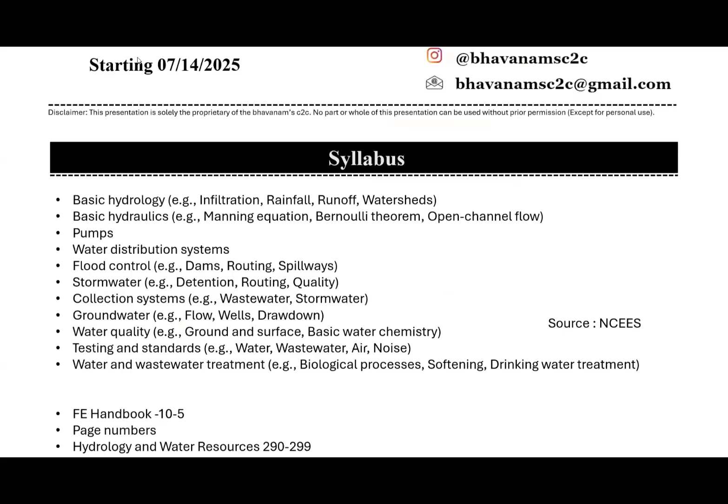Alright, taking you to the syllabus content. This is the syllabus content. I also got you the syllabus for fluid mechanics as well. Let's go with the contents of water resources engineering and environmental engineering first, and also let's give a look at fluid mechanics. You will understand why I brought fluid mechanics into the picture too, after we discuss the syllabus here.

Okay, the first thing is basic hydrology. It's going to discuss the concepts of basic rainfall, runoff, some infiltration, catchment area. These are the basic topics that we're going to discuss within hydrology.

And coming to basic hydraulics - you guys already understood what basic hydraulics is in fluid mechanics from the topic of flow measurement. The same formula, the same concept we're going to reuse here. Interestingly, the same formula is provided within the subject of fluid mechanics, and also within water resources engineering. So for example, if you search for Manning's equation or Bernoulli's theorem within the handbook, you're going to find it in a couple of areas, one in fluid mechanics and another in water resources engineering. Wherever you find it, the formula is going to be the same.

That's totally fine. And coming to pumps - there is no specific topic dedicated to pumps, but you will be able to handle it using the fundamentals that we discuss within the class.

Similarly for all the others as well: water distribution system, flood control, storm water collection system, groundwater - for all these five concepts, you'll have a direct formula from the handbook. All you need to understand is some tables, charts, and how to get the maximum out of the given formula.

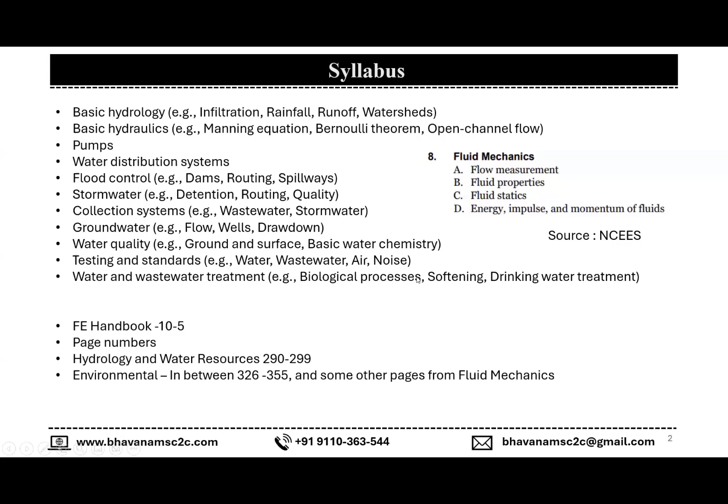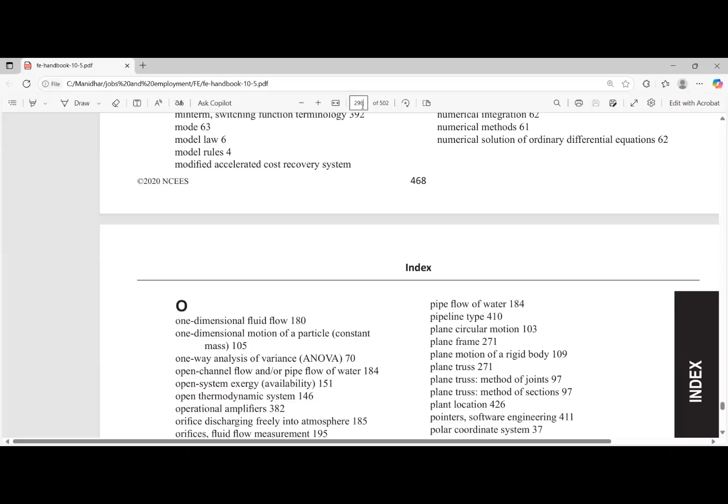So now we're going to discuss our first topic. But before discussing the first topic, I would like to make a quick tour from the handbook so that you guys will be able to understand what are the things provided to us for the subject water resources engineering from the handbook. I believe it is page 290. Yes, it is, and I'm just making sure.

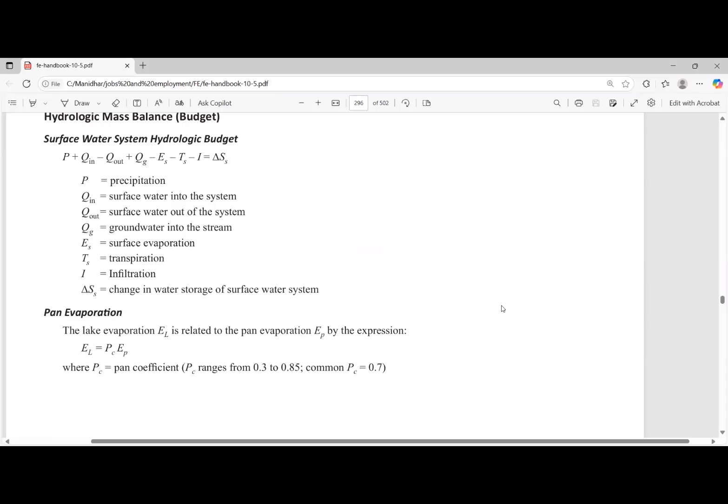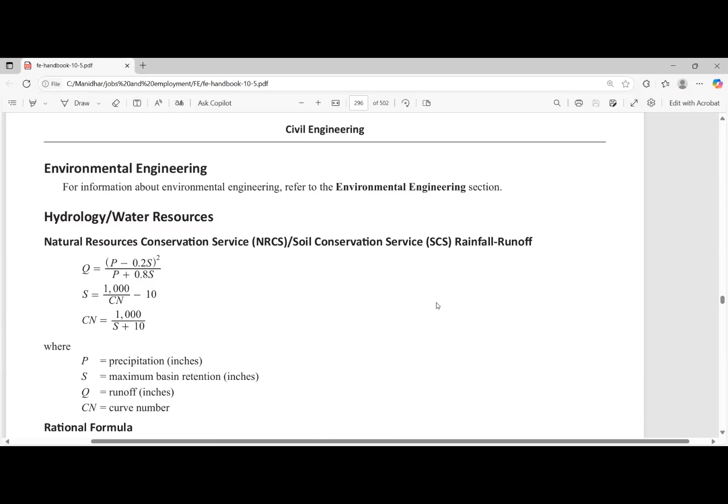So, as said, these are the pages from 290. Starting from 290, you're going to see the topics related to water resources engineering, and also environmental engineering. These two lines are not available to you within handbook 10.4 version, they are extra added here in 10.5. Similarly, there will be a few other lines extra added here and a few other lines omitted. So I recommend you guys, I suggest you guys better go with version 10.5, but not the previous versions 10.4 or 10.3.

So here are the formulas. Let's make a quick tour, and when we go to the concept, we'll jump back to the handbook again. Here are the things. They will give us few variables or few inputs within the question, like precipitation, infiltration, or intensity of the rainfall, storage capacity, curve number. We're going to discuss what is curve number. In our bachelor's we did not pay much attention to the curve number, but we're going to understand what it is here.

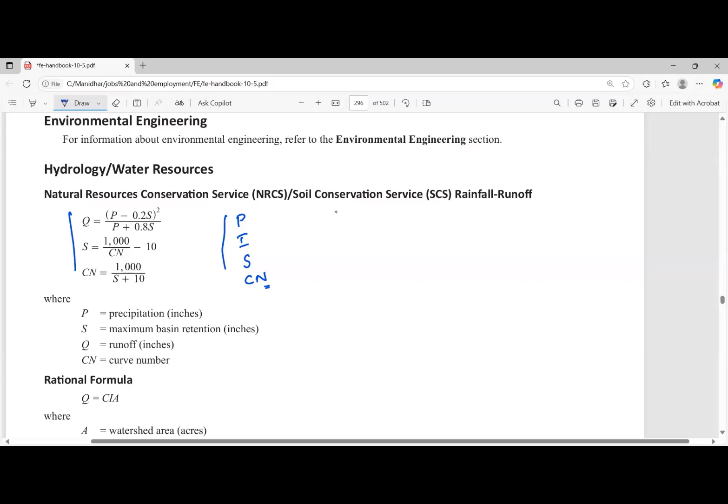So they're going to give certain inputs for us, and accordingly we will be able to calculate the runoff with the help of the formulas. We got to choose, or we have to identify, which formula is required for the given question. You will be able to figure this out by the end of this session, or with some amount of practice. I assure you guys, if you pay attention, by the end of today's session you will understand which formula you have to use to calculate the runoff. They may either give you NRCS within the question or SCS. If not, they're going to give you the title rational formula, or else they just give you some inputs like area, rainfall intensity, and accordingly you got to choose the formula.

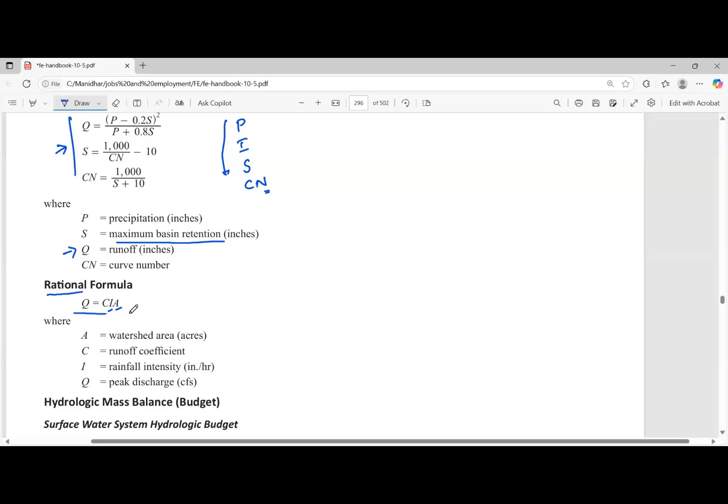So for say Q equal to CIA here, but there is no S here. When I say S, it is going to be maximum basin retention. So when they give you just I and A values, you got to choose this formula, but not any other, because from the set of these formulas, they did not provide any I value within them. So if you see any I value, which is rainfall intensity, then you got to jump to the rational formula.

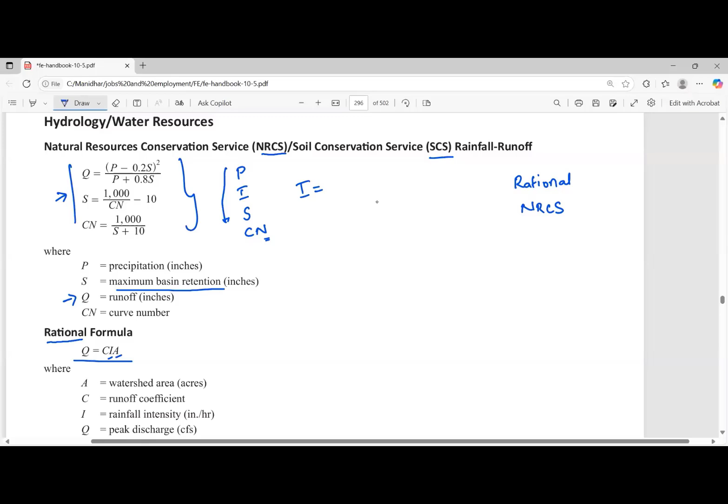Most likely, they're going to tell you which formula you got to choose for the given question. It can either be rational, or they may give you NRCS - when they say NRCS, this is the one. So you will be able to figure it out with some understanding. Now, a question to you: here they say Q equal to peak discharge, CFS. What does CFS stand for? Cubic feet per second. Yes, you're right, sir.

When you have to convert cubic feet per second to cubic yard per second, how do you convert it? My question is, if it is 54 cubic feet per second, how many do you divide by? 27. Divided by 27, you got it. So when you're converting cubic feet to cubic yard, you divide by 27.

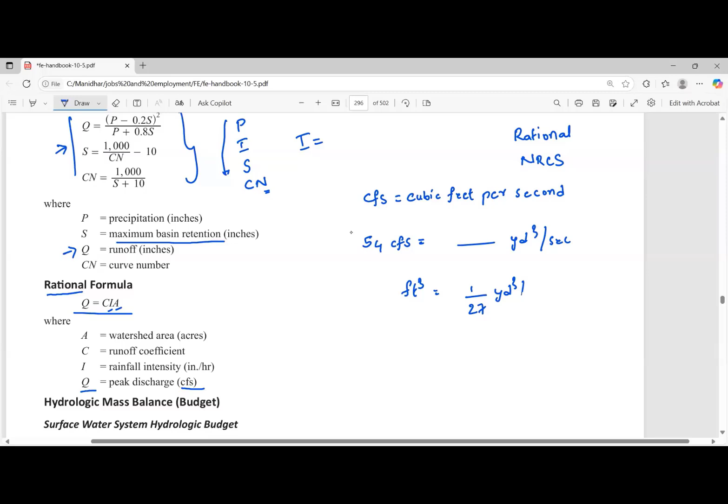This is because one yard equals 3 feet, and if you cube it, that's 27 cubic feet. So 27 cubic feet equals 1 cubic yard. In order to understand 1 cubic foot in terms of 1 cubic yard, you're gonna do this.

Suppose you forgot that 1 yard equals 3 linear feet, if you don't know that conversion, what you can do is jump to the initial pages of the handbook where you'll be able to figure out the conversions from one unit to another, like from yard to feet or feet to yard. You can flip to that page and do the unit conversions there.

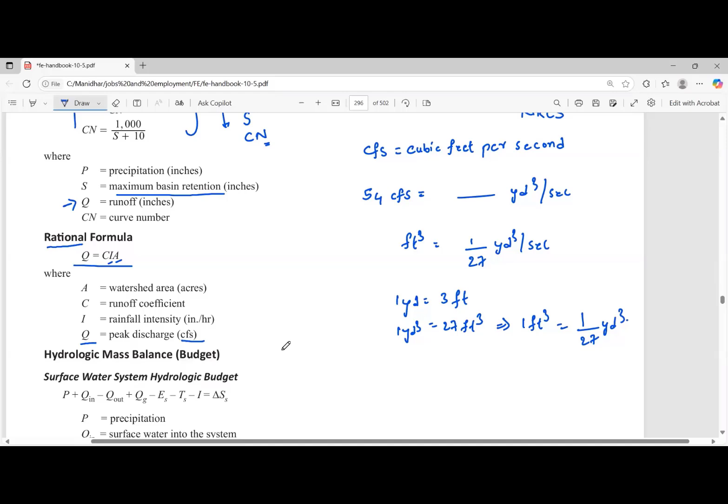So in this particular subject, pay attention to the units. Not only this subject, but for the entire exam you have to pay attention to units. Most importantly, within the exam, all four options you see will one way or another come from your calculation, so you'll get all the options as answer choices. But you have to get the right answer, and you'll get the right answer by doing the correct application of units.

The next thing is the hydrologic mass balance budget. You don't need to remember this title. All you need to understand is you may be asked to calculate the storage, or they may give you a few of the values here and you have to calculate one other value.

This equation represents that there will be some rainfall, and when there is rainfall there are some losses as well. So when there is precipitation there will be some losses. These losses can be for a number of reasons, like evaporation, evapotranspiration, runoff water, or infiltration.

There is some inflow of water and some outflow of water as well. What you understand from this equation is you have to add all the inflows, such as precipitation and discharge inflow through groundwater, and subtract all the outflows.

If you don't know what Q out is, those values or variables are described at the bottom of the formula. Understand the concept - you don't need to understand how the formula is derived, just understand the concept so you can solve the problem. The formulas are provided directly within the handbook.

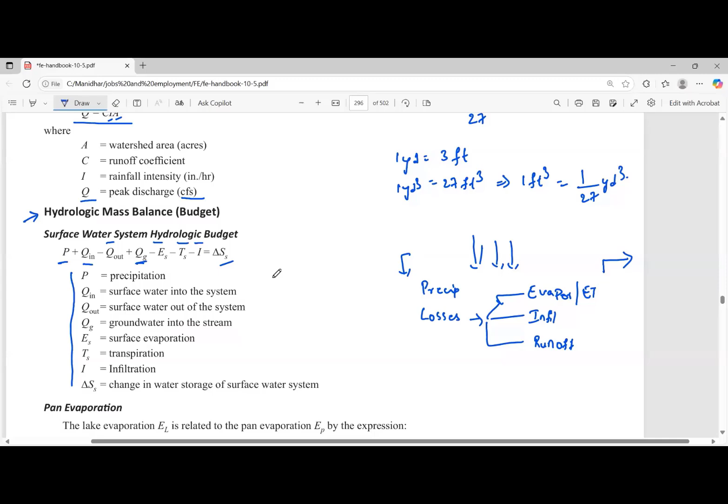The next thing is pan evaporation. What is the concept of pan evaporation and why do we need it? Any wild guess why we need this concept? You're right - it's to figure out how much water is going to be evaporating. For example, suppose this is a water body.

A water body of good size, say 100 meters by 100 meters. As a water resources engineer, or civil engineer, or environmental engineer, you have to understand the evaporation rate from this water pond. So what you do is put a pan in a specific area of this pond, and put some water within this pan.

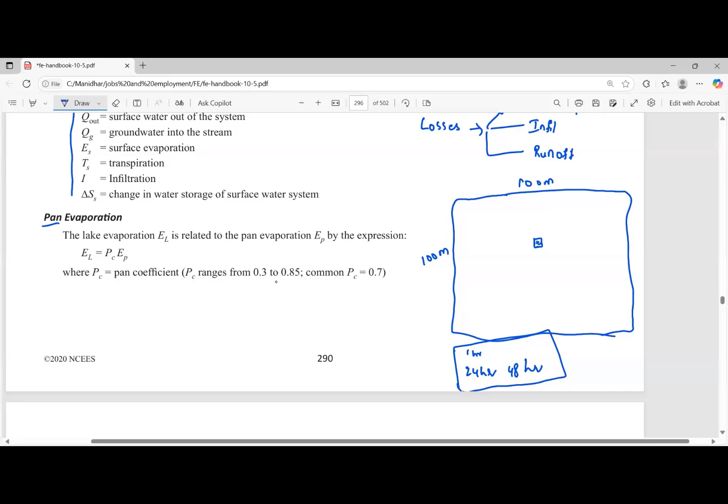After a few hours, they're going to do days of observation. So how it goes is they're going to take 1 hour of evaporation, similarly 24 hours and 48 hours. This interval is subjected to the environmental engineer - it's not a specific thing. So what they usually do is after a period of time, they understand the evaporation loss that happen from this particular pan. Based upon the evaporation loss from this particular pan, they understand the evaporation loss for a big size catchment area. So that's the concept of pan evaporation.

Here is the formula. In order to understand the lake evaporation, which is given by EL, it is multiplied by the pan coefficient, and the range of pan coefficient is from 0.3 to 0.85. In case they ask you to calculate the lake evaporation but did not give you the pan coefficient value, then you're going to take it as 0.7.

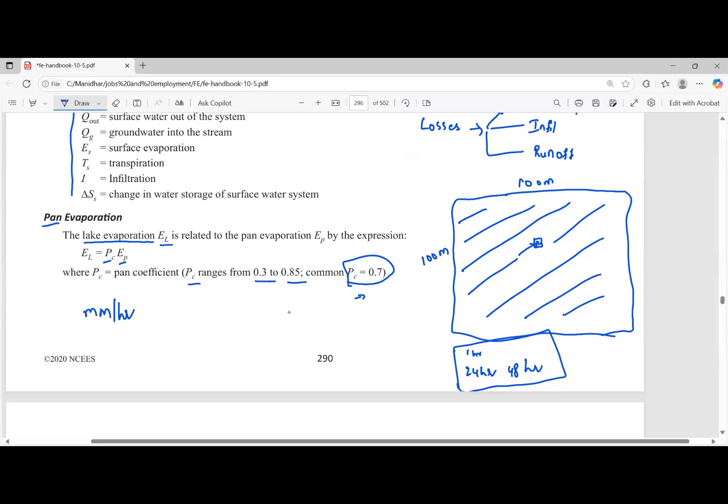And whatever unit they give you for evaporation, they may give you a linear unit, or they may give you in terms of millimeter per hour - something like that, you will get the evaporation rate at millimeter per hour. You've got to match the units as well. Pay attention to the units. When we jump to the problems, you will understand how we can pay attention to the units.

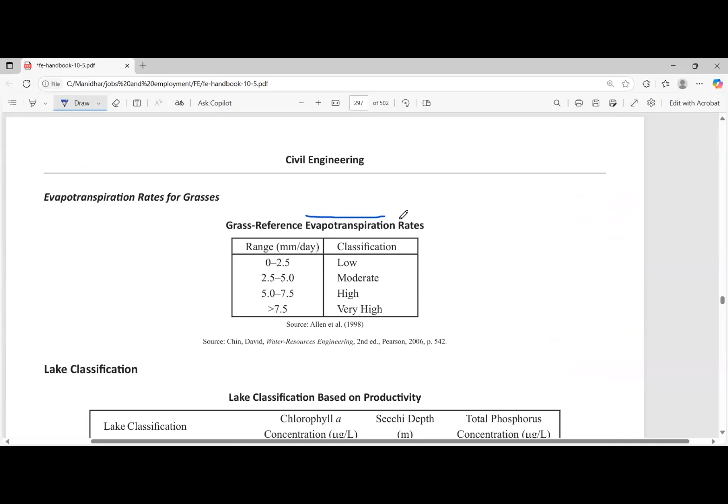And here is one other thing: evapotranspiration. This can possibly be a theory question, and it's a most underrated thing. You need not pay much attention, but as it is provided in the handbook, just give it a look - what it is, and what do you understand by evapotranspiration? Transportation of water from one water body to another through evaporation.

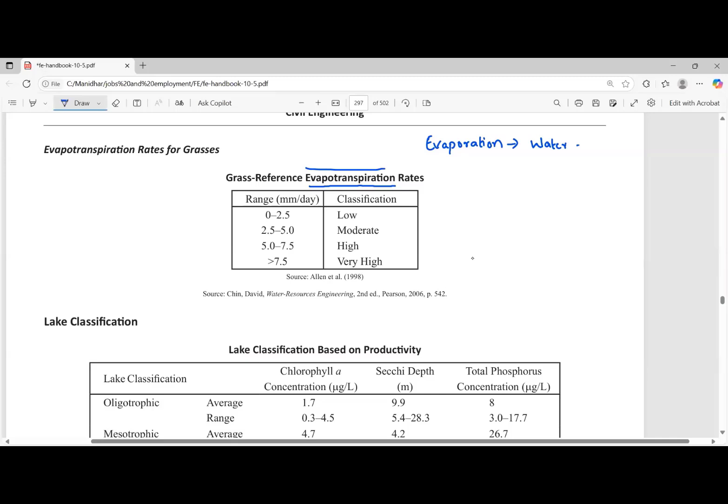Evapotranspiration is a combination of evaporation and transpiration. And what do you understand by evaporation? Like water turning into vapor from the soil or else from water bodies. Exactly, yeah - water turning to vapor, which is evaporation.

And now here is another question: what is transpiration? Water released by the plants. Exact answer. Now the combination of both - water released, or you can say water evaporated from plants, is called transpiration. So now the concept of both evaporation and transpiration is considered as evapotranspiration.

So how it happens is, though there is grass, there will be some sort of evaporation from its adjacent area, and also there will be some sort of transpiration from the leaves. So when these two happen in a common area, at a point of time you're going to pull this evapotranspiration into the accounts. But as I said, it is not of much great importance. All you need to understand is what is evapotranspiration, and they may give you a range like this.

If the evapotranspiration for a certain day is 0.01 inch, how do you classify it? Low evapotranspiration, low. So how do you say it? Since it is 0.01, it is in between 0 to 2.5, and hence it is low.

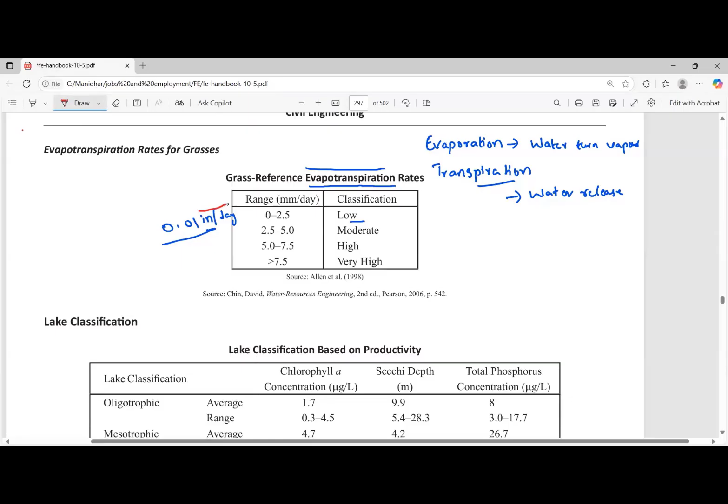Yes, okay, but let's pay attention here. What is the unit that I provided to you? Inch per day. And what does the table say? Millimeter per day. So we have to convert the inch to millimeter. What we're going to do is convert this 0.01 inch to millimeter. And 1 inch equals how many millimeters? 25.4 mm, correct? So when you multiply 0.01 with 25.4, it is going to be 0.254.

0.25, so I wonder something. It is 0.01, if you multiply it with 10, then you're gonna get it as 0.1. So here what I believe is, it is not 0.254, it should be 2.54, if I'm right. Or when we multiply... 0.01 into... no, you're right, 25.4 shows... 0.254. No, 0.254, right?

So here what I want to say is that if you are sure about the multiplications without using a calculator, then go for it. But if not, then there is a chance that we can make a mistake like this. We may assume that it is 2.54 instead of 0.254, as we just did. So in order to be clear on these kinds of calculations, if you are sure, then definitely go for it. If not, the best bet is to pull out your calculator and multiply it accordingly.

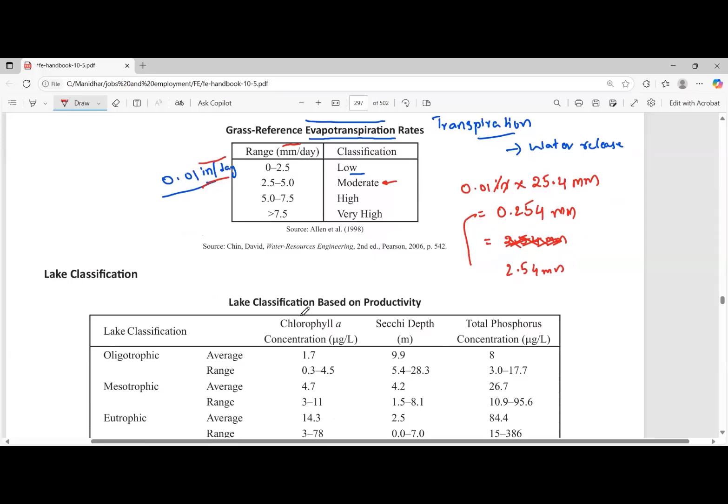Once again, pay attention to the unit that is provided to you within the question, and accordingly we'll be able to do it. Are we good on this? It's no biggie, but still you got to understand how the question can be framed. You should be able to answer it.

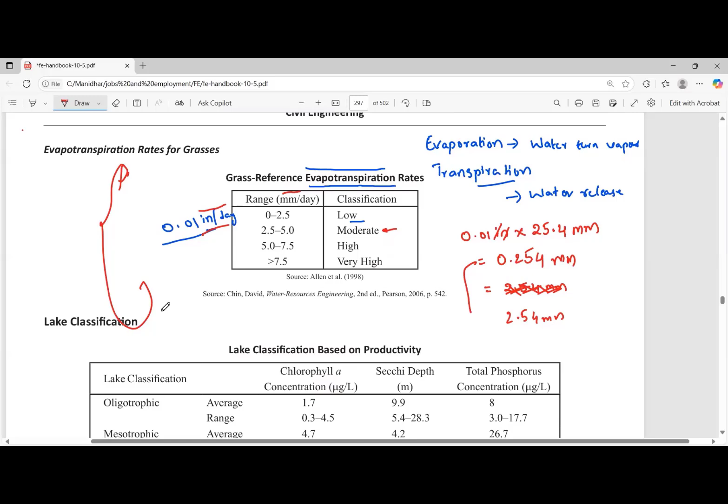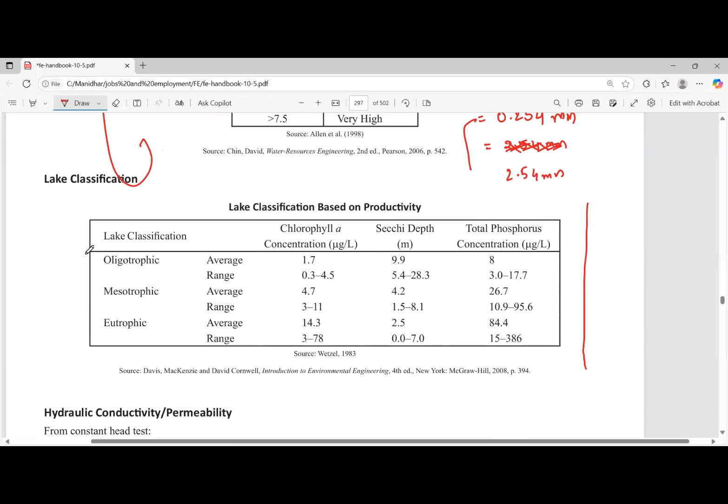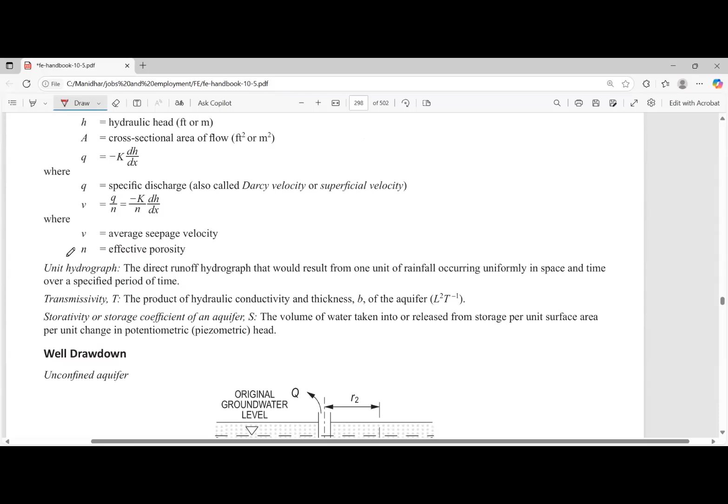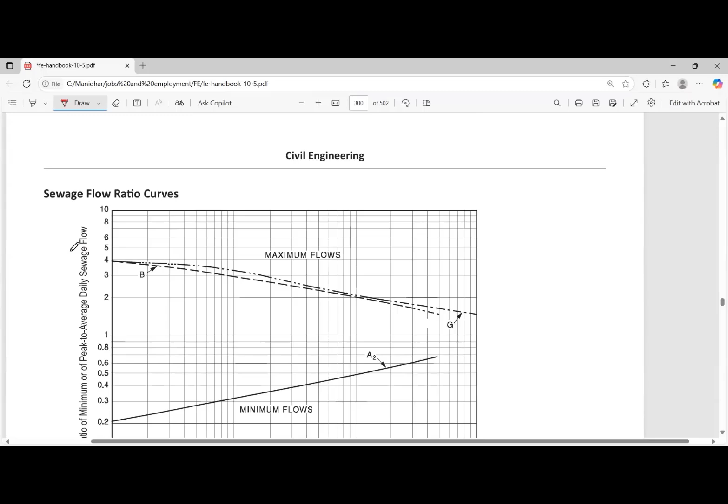Next thing is lake classification. We're going to discuss lake classification within the subject of environmental engineering, when we discuss water quality. We are skipping this for now, but it will be covered under environmental engineering. Hydraulic conductivity goes to basic hydraulics, and from there Darcy's law, well drawdown, Dupuit's formula - we're gonna discuss this topic by topic. I'm just letting you know what's here, and also sewage flow ratio curves.

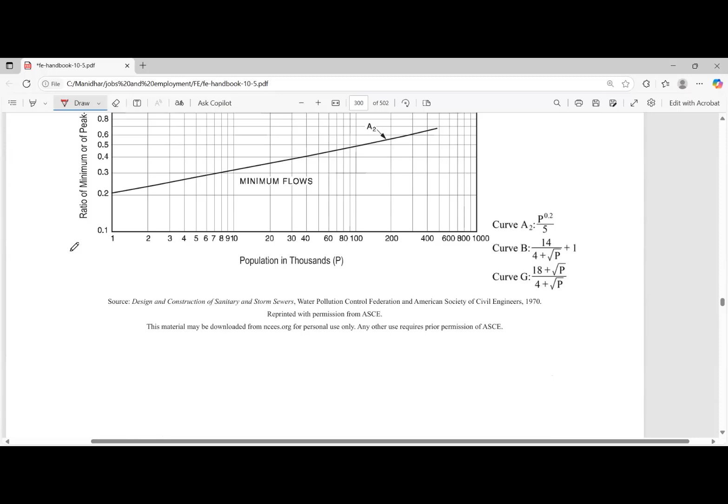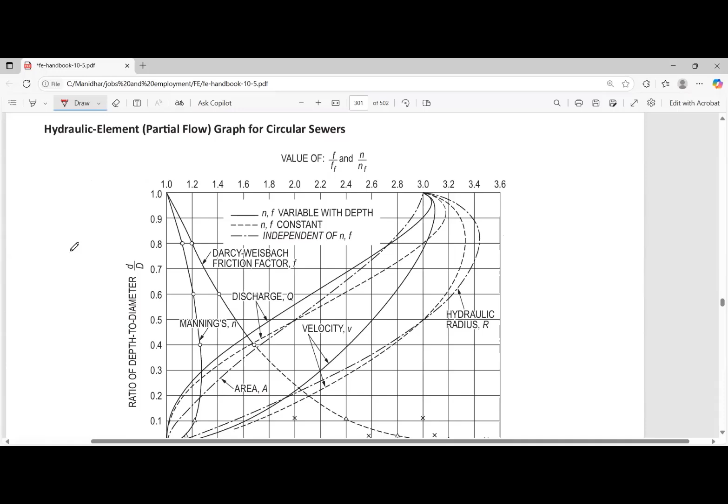In sewerage flow ratio curves, they may give us diameter and velocity. Accordingly, we will be able to calculate how much water is required for a particular day within a given community. Out of all the topics we discuss in water resources engineering, this topic is going to be a little critical. And if you understand it once, then you won't be making any kind of mistake.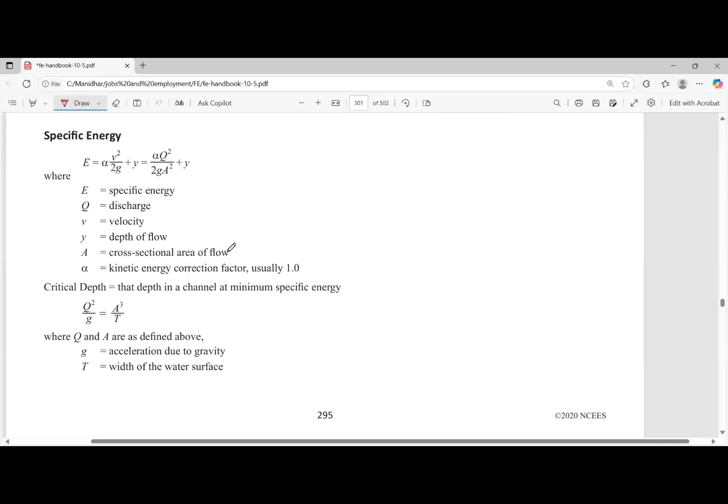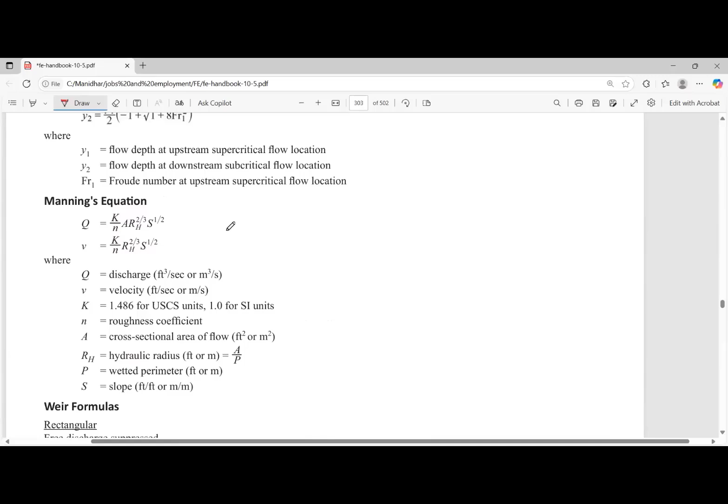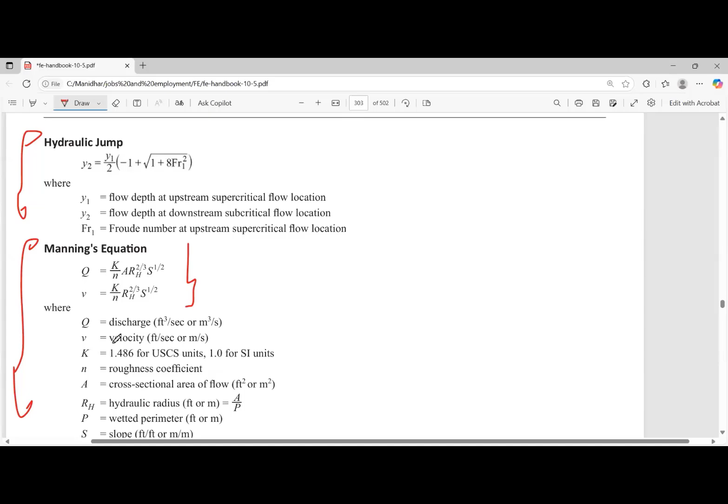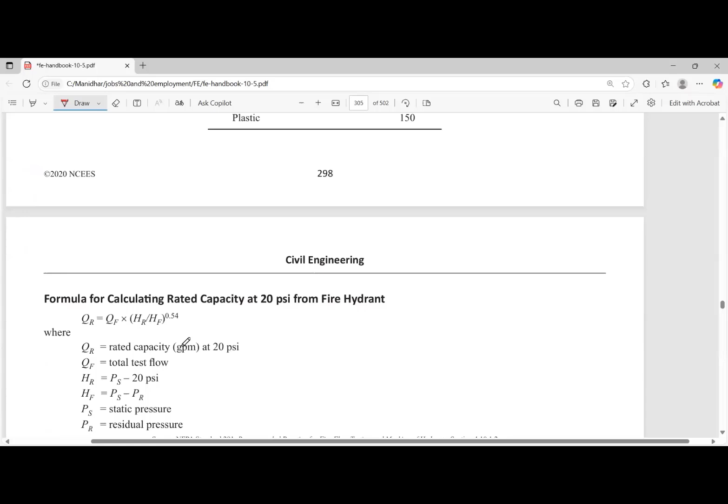Also, one other important topic is going to be somehow related to specific energy, and so are these formulas as well. You're gonna look at these formulas within the subject of fluid mechanics - Manning's equation, Hazen-Williams equation - from the subject of fluid mechanics. The same formula you gonna use here as well, so there won't be any kind of change within the formula. It will be the same formula, same units, same terminology. No big change. We're gonna run through all these formulas and solve a good number of problems related to all these and all kinds of variations you can expect within the exam.

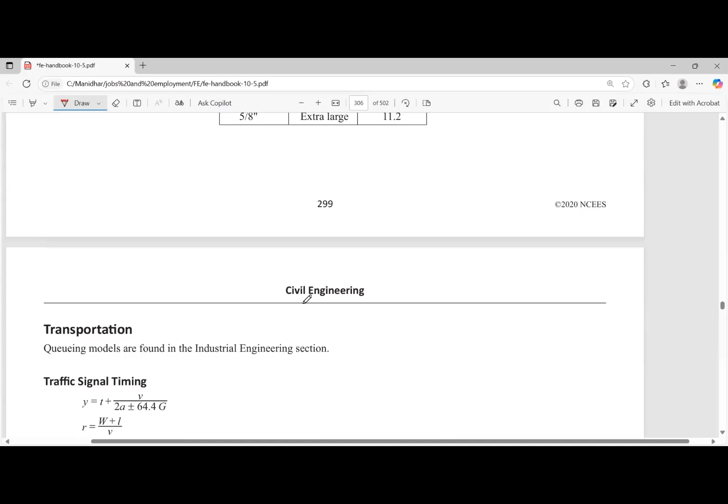You can make a note of the page numbers - we're going to end with 299 for water resources engineering, started at 290, so altogether it is 10 pages. If you are thorough with these 10 pages of content provided to you within the handbook, then definitely you will be able to answer 7 to 8 questions within the exam. All you need to know is where the formula is and which formula you got to use for the given question. That should be it. Besides that, as I emphasized, pay attention to the conversion of units.

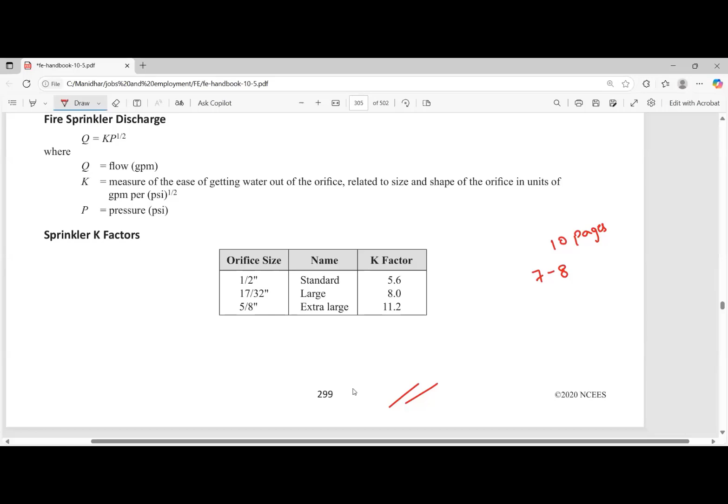So here is our first topic, which is basic hydrology. We're gonna discuss one by one. You all know what is evaporation, need not discuss much on it. But I would like to ask, any of you, please, if you know what is condensation, can you let us know what condensation is?

When the evaporated water cools down and settles back into the water body - perfect, so yeah, that's condensation. Basically condensation is the reversal process of evaporation. And as you said, the water is getting cool and comes back to the earth's surface. And the process of coming back is called precipitation.

The process of turning that gas molecule into liquid molecules is called condensation, and the process of falling down is called precipitation. So what is sublimation? Sublimation is not of great importance, but it is the process where solid particles directly convert into vapor without converting to liquid.

Is there any such example you can let me know? Yes sir, dry ice. Dry ice, exactly. Camphor. Yeah, camphor as well.

Okay, and what is meant by transpiration? Snow? Snow has got to convert to water first, and then it has to evaporate as a gas molecule. So I don't think snow falls into the concept of sublimation, but yes, dry ice and camphor do. So in cold areas, snow gets vanished without converting to water - in that case, maybe you can say that is a part of sublimation.

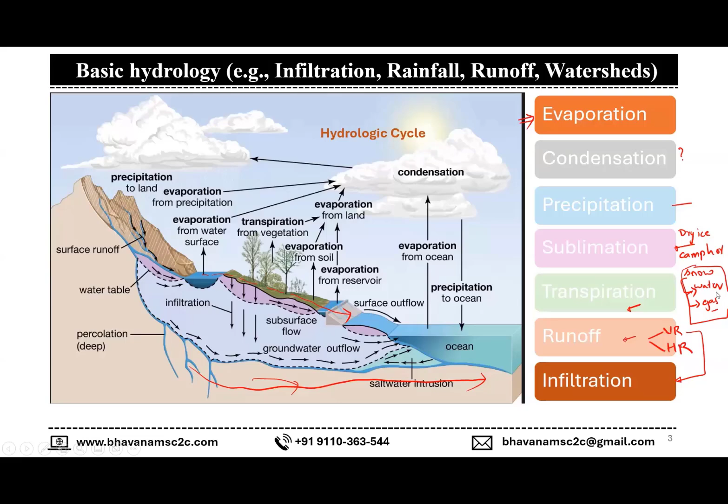Both answers are right. So these are the major contents of hydrology. Now, for your understanding, there are certain factors which affect all the topics we discussed - factors which affect infiltration, such as soil properties based upon surface cover, soil saturation, and rainfall intensity. There might be something else, but these are the major things we're going to discuss.

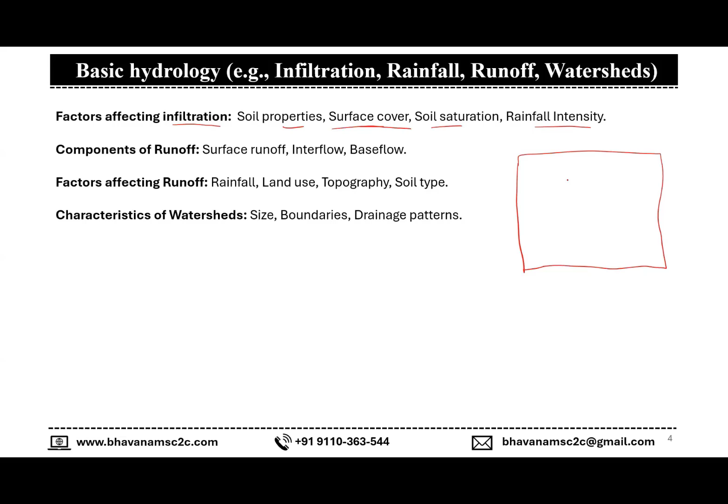And how does surface cover affect it? For example, there is a big plot, or a community. There are buildings in the community, built with concrete. In between the buildings, or on the outer side, you're going to have some vegetation area. All the dotted area is going to be vegetation area, and the rest is a concrete area - they did a concrete slab within this portion.

So where can you expect infiltration to happen - in an area of vegetation or in the area of concrete? Area of vegetation. Why is that? Because that is the ground level - infiltration will be more in vegetation, because the concrete surface is non-permeable, so penetration won't happen. That's why we see more infiltration in vegetation areas. An apt answer - I definitely agree with this and other answers as well.

So vegetation is going to accept, or let water molecules pass through that soil or through that top surface.

Whereas concrete area does not let water pass through it because it is a non-permeable membrane. Whereas vegetation is an area where you're gonna observe some sort of pores. When there are pores, eventually it's gonna let some water pass through. So that's how it is.

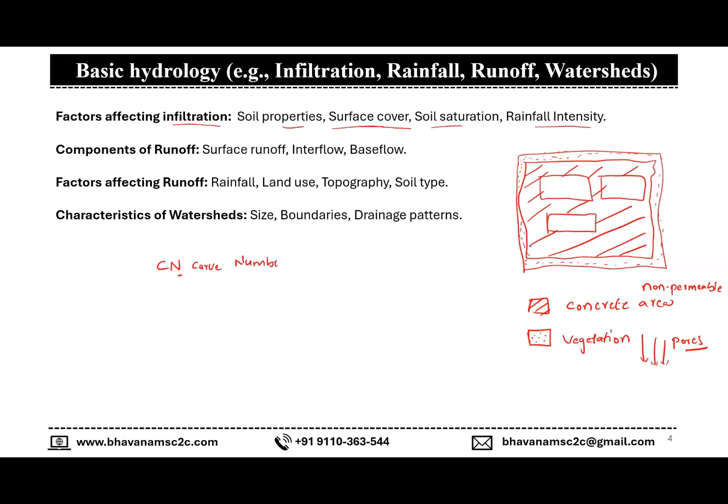So the curve number is nothing but how much amount of runoff occurs. The limits of curve number are 30 to 100. If the curve number is more, it means less infiltration, and if the curve number is less, closer to 30, it means more infiltration. We're going to see this thing as well.

And as we discussed, runoff is going to be surface runoff, interflow, and base flow. When I say surface runoff, it is going to be on top of the surface. Whereas interflow, it is infiltration. And base flow is like water percolating through the layers of soil, and after percolating through a certain distance, it runs through the horizontal layers in between the bedrocks, which is considered as base flow. And this base flow joins the water bodies after a certain distance.

On top surface, after rain, there can be a running of water. So runoff can be in these three patterns. And the factors that affect runoff are rainfall, land use, topography, and soil type. This is just for your theoretical purpose and to make things clear for you.

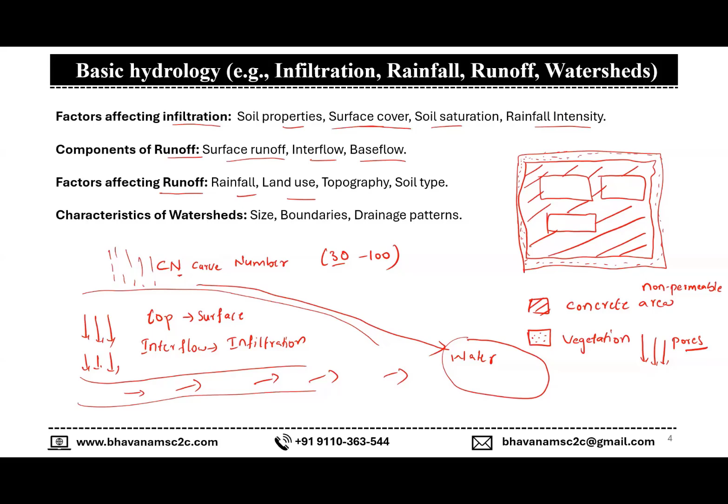Now, this is one theory question that I framed for you, in case you can expect these kinds of questions too, but very minimum. Read the question to yourself, and you're gonna give me the answer.

Evaporation. So no explanation needed. The question is, which step in the hydrologic cycle converts water from a liquid state to gaseous state? The answer is evaporation. Whereas condensation is a reverse process of evaporation. So does precipitation as well, which is the process by which condensed water in the atmosphere falls to the surface. That falling concept is called precipitation.

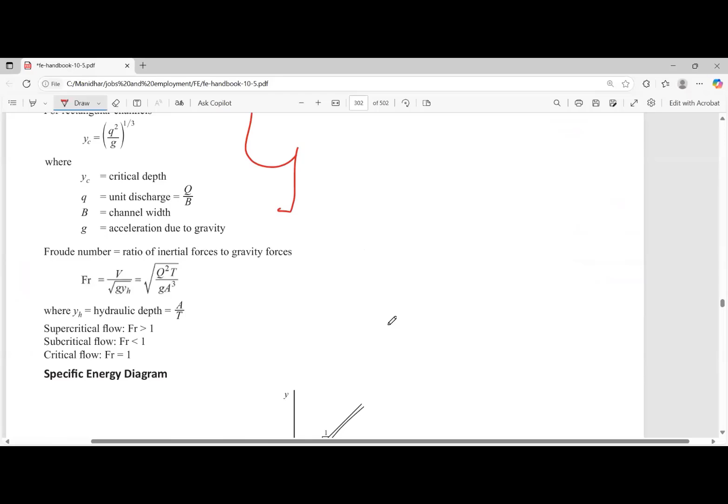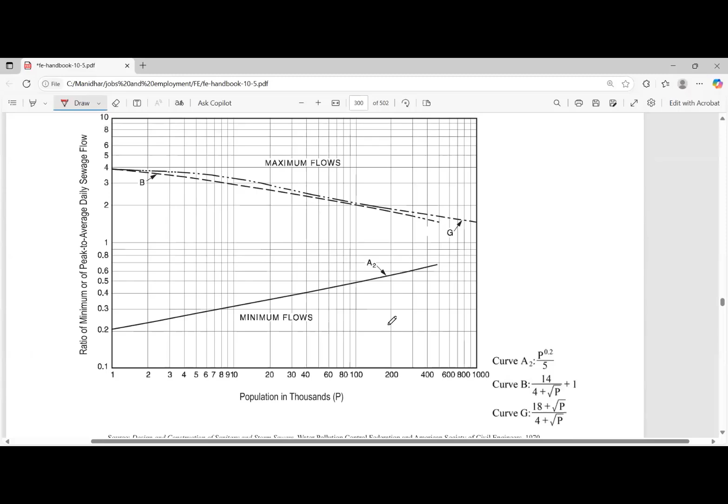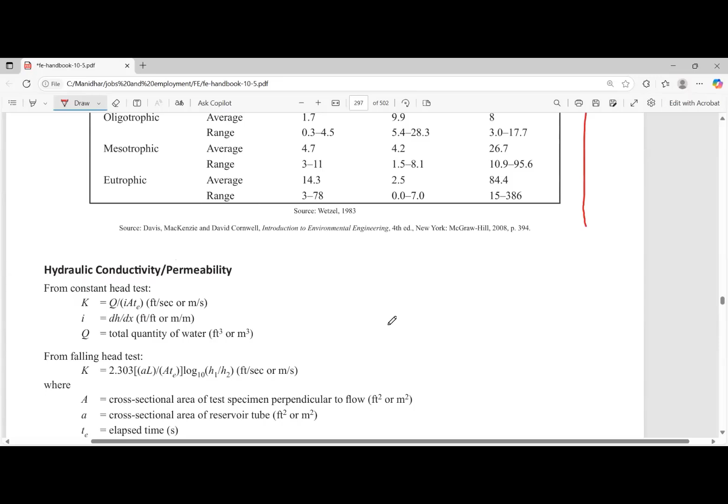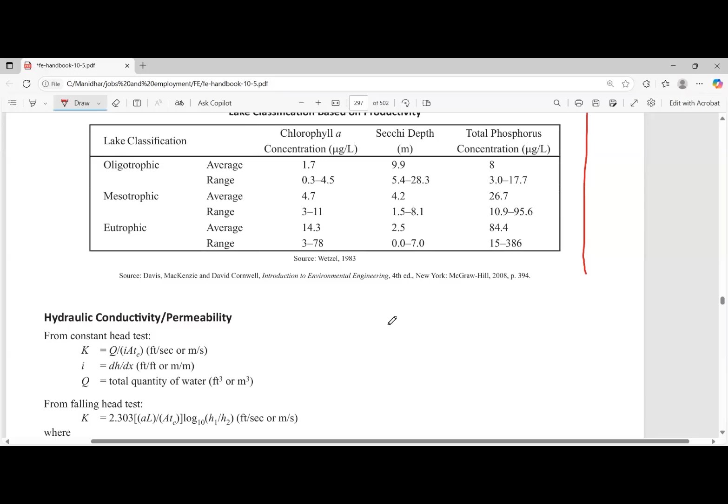So the thing is, having minimum knowledge related to civil engineering and a good number of years of experience, you should be able to solve all kinds of questions. If there is no time limit, though they give you the handbook, you should be able to solve like 80 to 90 questions without any problem. But you got to solve within the stipulated time. If you pull down the numbers, it is going to be 2 minutes 54 seconds for each question, to be precise, so roughly 3 minutes. Within 3 minutes, you got to find out where the formula is located, plug in the values, check out the result, and convert the units. That's all we need to do to the maximum extent.

All right, so here we are rediscussing the concept of runoff.

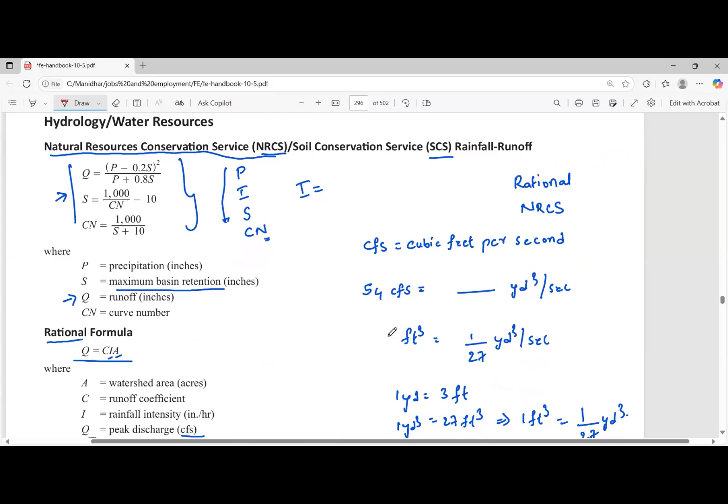So does the peak discharge as well. Okay, question to you: is runoff and peak discharge the same? So the question can be framed that way. It won't be the same. No, it won't be the same - like the base flow, everything adds, then there will be an increase in the peak discharge. So I'm thinking in that way, they might not be the same. Yeah, and I would like to hear one other answer as well.

Someone is about to say something. It is like how much water is leaving, then we can call it runoff. But when it comes to peak discharge, it's how the water is flowing to the maximum point in a particular time. Yeah, you're right, you're absolutely right.

And one major difference here I would like to let you know - both the answers I got from you are absolutely fine and correct. So I would like to add one other point: the runoff is calculated in terms of inches, whereas the discharge is calculated in terms of CFS, which is volume, whereas the runoff is calculated in linear dimension, in terms of inches.

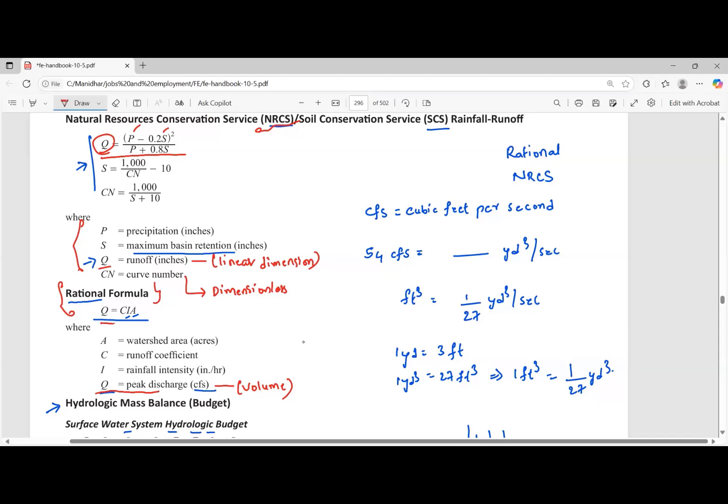Okay, and also one other thing is the rational formula. What is the general formula for discharge? What do you understand as the general formula for discharge? Whatever comes into your mind - what volume is the formula for discharge? Like in fluid mechanics, the volume flow of water by time percent - we will consider Q is equal to AV. Okay, I got Q equal to AV, and somebody said velocity times area.

That's absolutely fine. And I missed one other answer - flow per second, something like that. Yeah, flow per second, absolutely fine. How much flow is happening within a unit period of time? It can be seconds, or hours, or any course of time, but yeah, this is the usual conversion that we follow. Okay, Q equal to AV, that's one good answer that I like.

Here it is the same - Q equal to CIA is the same. Whereas C is the coefficient, it's some coefficient that we don't know at the minute, but it is a coefficient. A stands for the same area as before, and V is velocity, but here that particular velocity is the velocity of rainfall. It's the same formula - discharge equal to A into V applied in a different format, where I equals the velocity of rainfall, called rainfall intensity, given in inches per hour.

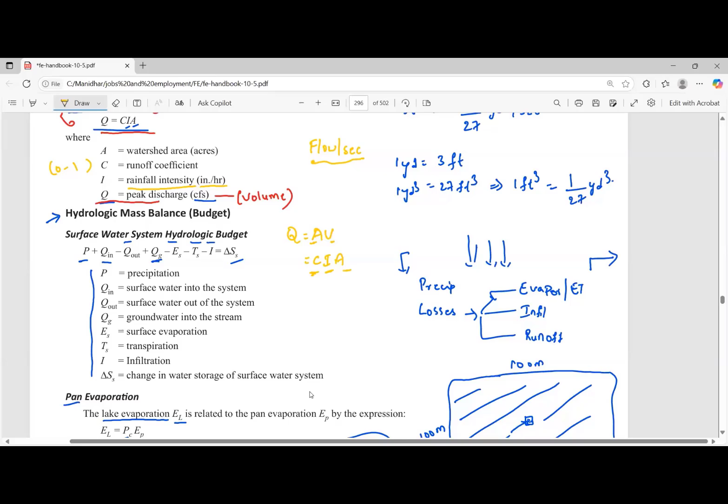So not to kill too much time, we're jumping back to the problems. Here's the same formula, I pulled it up just to let you know about curve number, since curve number is not provided to you in the handbook, and curve number is a dimensionless parameter. The range of the curve number is 30 to 100. This is not provided to you in the handbook. But it's better if we learn about it.

This is a summary. Though you don't need to remember it, understanding it will benefit you while solving problems. A higher curve number, closer to 100, means less infiltration, which is a concrete kind of area. Whereas a lower curve number is going to be a vegetation area.

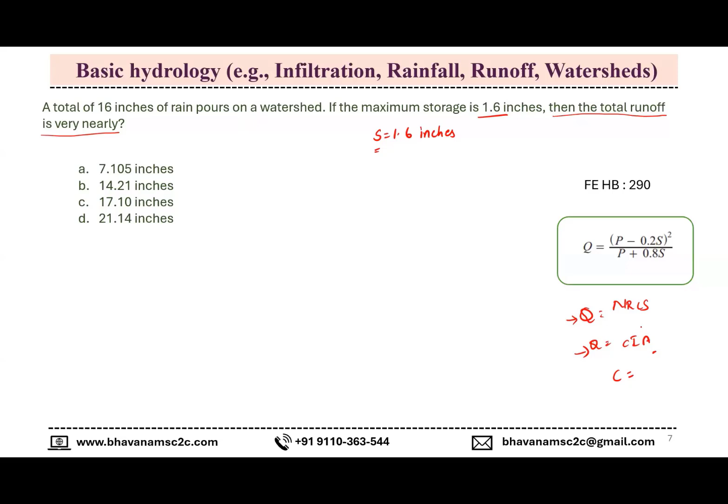We're provided the maximum storage, so based on that - yes, and they gave us maximum storage, which is 1.6 inches. And what else makes you think of it? They haven't given the coefficient - exactly, they did not give the C value. They gave the S value. Most importantly, what did they ask us to calculate? Total runoff. When they ask for total runoff, which Q stands for total runoff here - the one in the NRCS formula, or the one in the rational formula? NRCS. Flip to page 290 of the handbook and you'll see Q equals this particular formula, where Q stands for runoff. Whereas the other Q, which equals CIA, is the rational formula that stands for discharge - that's for peak discharge. So here are the things: they gave us the P value and S value, which are 16 inches and 1.6 inches.

From this particular formula, you'll be able to obtain the value of runoff. And what should be the unit of Q here? Inches - you're right, sir. So what value are you getting for this? If you substitute in, plug in the values, pay attention to the brackets as well - 14.22.

14.22. All right, so it can be 14.22 inches. So, okay, in exam, it can be in such a way.

Then the total runoff is very nearly in feet. And in the options, they may not give you any units. If that is the case, the options will be like, they're gonna give you one option which matches the feet, and another option which matches the inches as well. So looking at the options, we may think that 14.21 is the answer, but in case if they provide feet in the question, then you got to convert that.

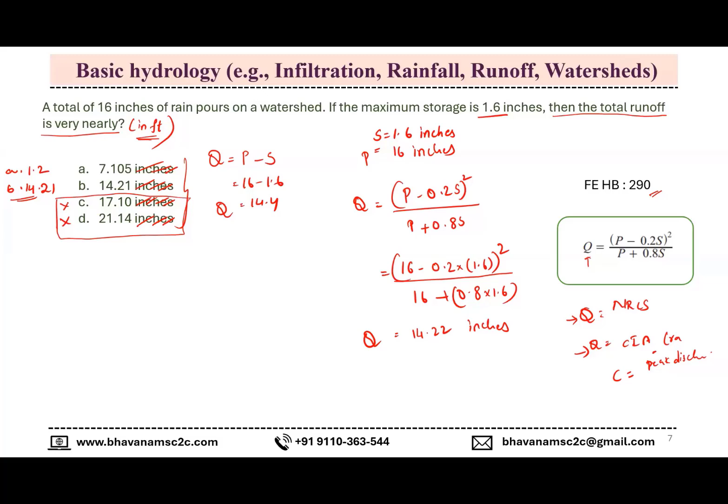And if the precipitation itself is 16 inches, then your runoff cannot be more than 16 inches. So here in this particular example, option C and option D should not be your answer for sure, because in maximum of the cases, unless and until the area is very wet, the runoff is lesser than the precipitation. All right, are we good here for this particular formula?

Okay, moving forward. So here is one interesting question. If you solve this, then I admit that you will be able to solve any kind of problem that is related to basic hydrology. For now, we are solving it together, but you're going to see similar problems within your practice as well.

Read the question and understand it. Let's solve it together. The question says, an urban area consists of 15 acres of lawn space with curve number 70 and 4 acres of paved road with curve number 97. If the total precipitation is 16 inches, what is the approximate runoff?

What is the formula that we have to pick here? What are the values that they gave us within the question? Q is equal to C I A. Why is it so? As in the question provided, they gave the area. They provided the area.

Agreed. So don't we have area within the NRCS formula? No. Yes, they did not provide, but still, what do they ask us to calculate? Approximate runoff. Runoff means which formula you got to pick it up? NRCS. Absolutely fine.

And when you're picking Q equal to CIA, what is the unit of Q? Inches? Cubic feet. Yeah, when you're picking a rational formula, it is going to be cubic feet per second, whereas if you're picking NRCS formula, the unit of Q is inches. All right, so you will be having a good number of clues provided to you on which formula you got to pick.

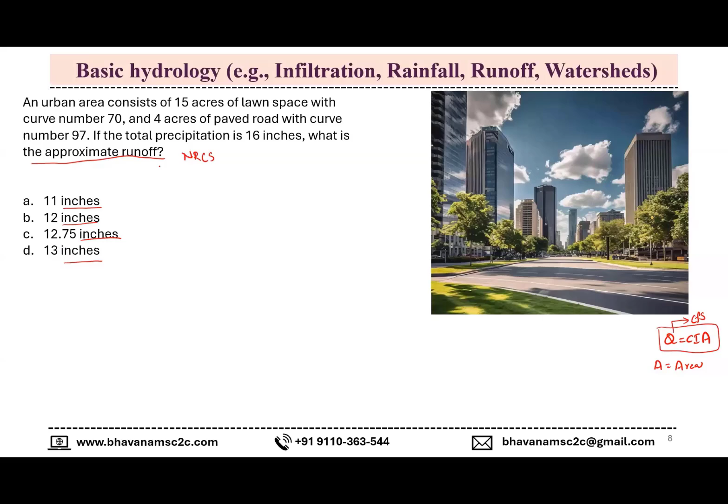Okay, so now which formula goes good for this? We got a clarity that we have to use NRCS formula, but in NRCS, which formula goes good? What is the formula for Q? S equal to 1000... what is that? Curve number. What is the curve number?

So in the question they gave us area, 15 acres of lawn space with a curve number 70, whereas 4 acres of paved road with a curve number 97. So what is the formula that is associated with curve number and the precipitation so as to calculate the approximate runoff?

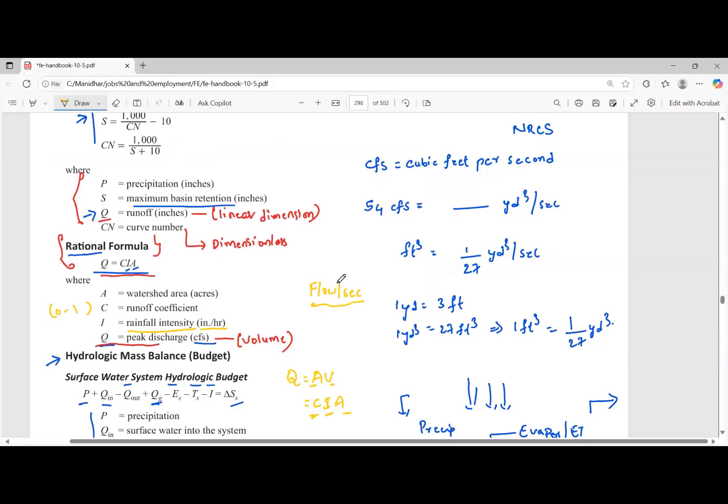Able to figure it out? Is there any formula that is associated with curve number? It's associated with two of the formulas over there. Uh-huh, yeah, you are right. So now let's run back to the handbook here.

So yeah, curve number, they gave us a formula. We already got curve number, which is provided to us within the question. In order to calculate Q, what are the variables that we require? One is P and another one is S. Correct? Yes or no? Do we need any other variable apart from P and S? No, right? It is just the variable P and one other variable is S. So already P is provided to us within the question and we got to calculate S. So if we are able to calculate S and substitute the value of S within this particular formula along with P, then we will be able to get the value of Q. Correct?

In order to calculate the value of S, it is going to be 1000 divided by curve number minus 10. But here is the question.

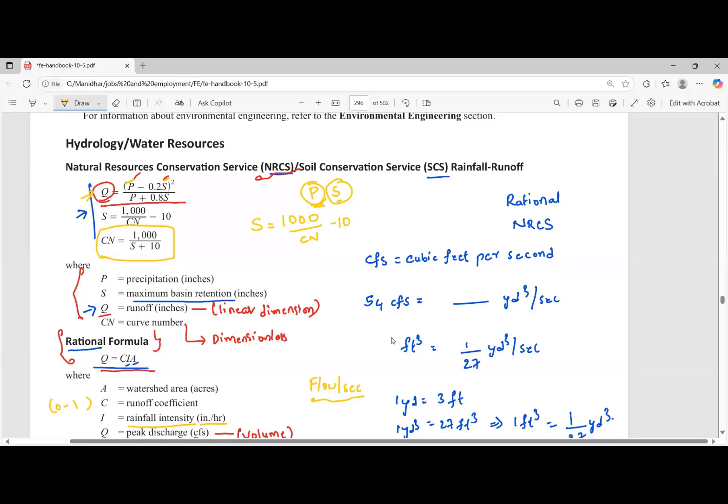Within the given question, they gave us two curve numbers. So how are you going to do it? How are you going to handle such a case when they give two curve numbers? 15 minus 4, okay.

Question to you guys, and also I'd like to brush your memory. You attended the subject mathematics and statistics. If you did not attend it, that's not a biggie, but those who did should be able to answer this. Weighted arithmetic mean - you remember this concept? Yes, okay, 15...

15 into 70, 4 into 97. I got exactly, 76. You guys are amazing doing that.

So weighted arithmetic mean, you're gonna do that. What is curve number here, you're gonna get A1 C1. C here stands for curve number, I just wrote it as C for your understanding. So in order to calculate curve number, you multiply area and curve number, then add them and divide by total area. Then you will get the curve number for the entire plot, a single common curve number.

Most importantly, when you calculate in such a way, the curve number should be within the range they gave - here the range is 70 and 97. So if you calculate a common curve number for both lines, it should fall within 70 to 97. Now let's calculate and see if it falls in that range.

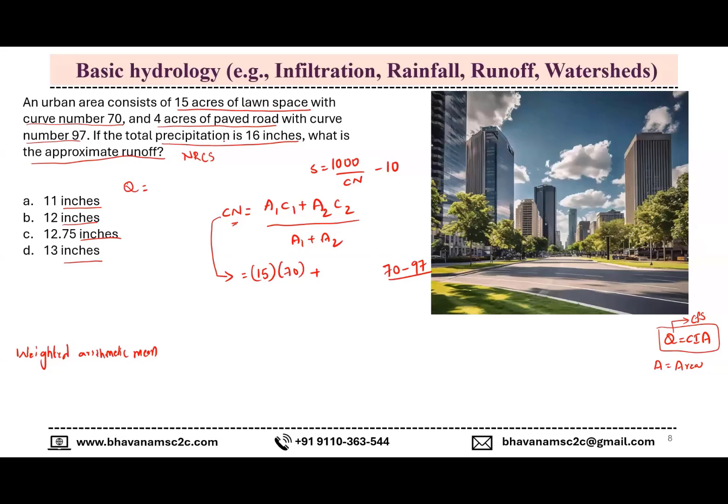A1 is 15 acres with curve number 70, whereas A2 for the paved roads is 4 acres with curve number 97, and total area is 15 plus 4. So what's the curve number for both together? 76, 75.68, thank you.

75.68, 75.68. Yeah, okay, that's the curve number.

And what is the unit for curve number? Dimensionless, it's a dimensionless parameter. So no unit for that.

If possible, guys, please scribble it down so that while discussing, you look at the things again and again - they'll sit in your memory. Okay, so now answer is C.

Answer is C, let's see if it is right or not. So we got curve number as 75.68. And what is the S value after getting the curve number? 3.16 inch, that's a good thing - you emphasized the unit.

3.16 inch. Now you got the P value, which is 16 inches - that's a common precipitation for the entire area with curve number 75.68. At this point you don't require curve number because you got the value of S, which is 3.16 inch. Now you're going to calculate the runoff based on the P value and S value.

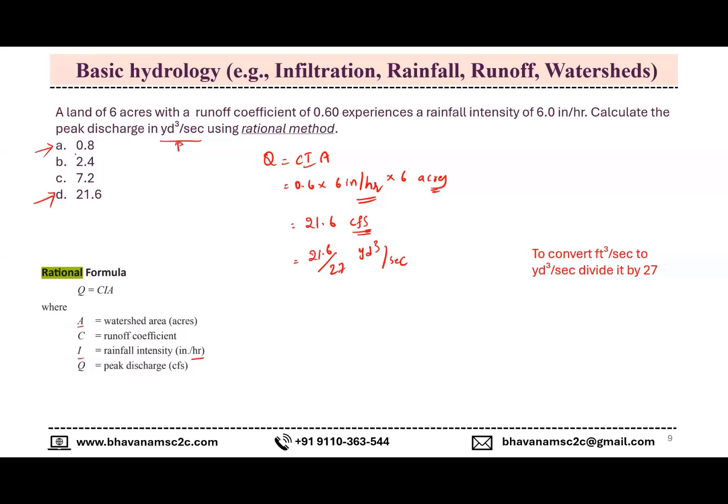If you multiply, you're going to get an answer of 21.6, but the units here are CFS. They emphasized the unit as cubic yard per second, so we got to convert this cubic feet per second into cubic yard per second. You do that by dividing by 27, and that converts cubic feet per second to cubic yard per second, giving you the answer of 0.8.

Among all the given options, somehow or other you're going to land up with the wrong answer too. Once again, there should be a second check whatever the problem you do within the exam. Pay attention to the unit that is provided to you. I am damn sure, having minimum fundamental knowledge and the formula in front of you with a calculator in your hand, you're going to get the answer, and that answer is provided to you within the options. But you're going to pick the wrong option because of units.

So when writing a formula, can we go with the conversions in the formula, like using a handbook, CIA into whatever the conversions, 1 feet to yard square, then we can get it right away, right? You can do it, absolutely fine. That conversion is up to the level of aptitude you have. So you can convert inches per hour to yard per second, and you can convert 6 acres to yard square. If you do so, you're definitely going to land up with the answer, but you've got to make it accurately.

Okay, and the next thing, this is one other question. Do you want to solve this problem yourself, or shall we solve it now? We'll solve it ourselves. That's a good thing. This is an add-on question to this question.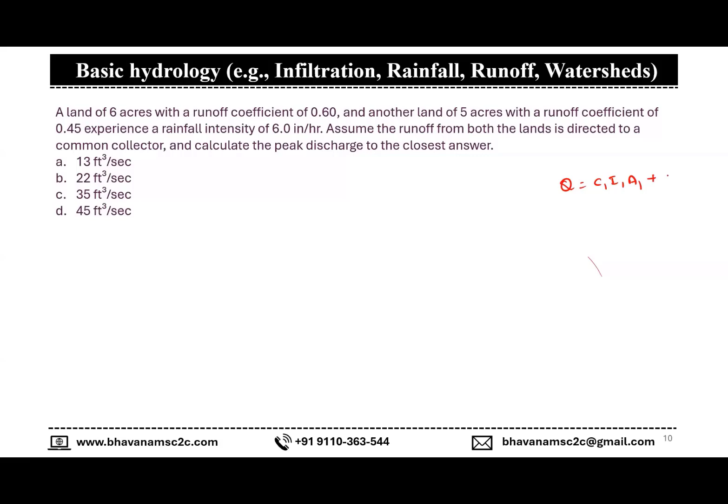Take a screenshot or photo of this. Tomorrow's session, we're going to start with this question if you do not get an answer. If you get an answer, that's fine, you'll be able to solve it. No biggie, you're going to apply the same formula, but you're going to sum it up like this. If you use this, then definitely you're going to get the answer.

All right, so any questions for the day? Here also you can apply the weighted arithmetic mean also, right?

Yeah, that's a good question. That's really a good question. I'm foreseeing this question actually. So, well, you cannot apply it, but why? If you understand this, then I admit it, you understand the total hydrology concept. Here we cannot take the arithmetic average. Why is that? Because of the intensity they gave.

Okay, they gave us intensity. Intensity is going to be the same, that's for sure. But here, okay, here is the question: for curve number, we are taking arithmetic mean, but here for runoff coefficient, we are not taking arithmetic mean. Why is that? Rational method - what's the reason?

You said maybe it's because the intensity for the both rainfalls is same for different both lands. That is understandable, but why are you not taking a common runoff coefficient for both?

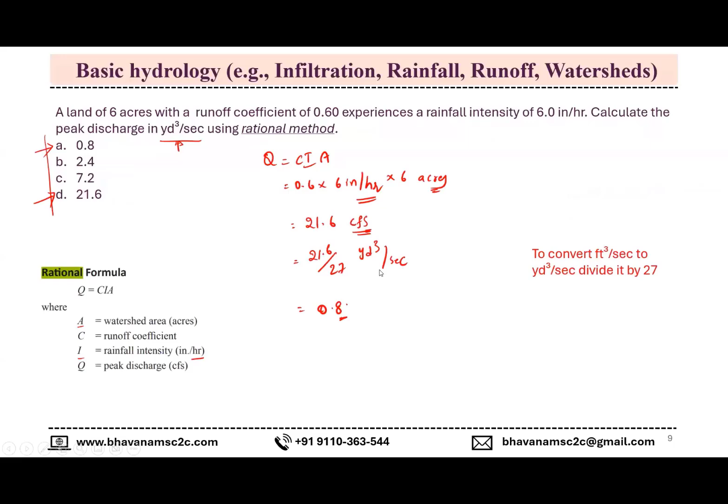Okay, let's go back to the visualization. Once again, I'm taking you back to the previous question, okay? Whoever asked this particular question, I have to appreciate this - you definitely got a good doubt, I can say that. Visualize this question here. What does it say? It says that 15 acres of lawn space, which is a green space of 15 acres, correct? Is it because this question comes under same land, and there we are considering two different lands?

Well, exactly, they have the approximate - that's the answer, that's the answer. So, as you said, you're right. The 6 acres is going to be one plot, and the 5 acres is going to be one other plot. These two plots are two different plots, and hence you cannot get a common runoff coefficient here. Suppose within the same problem, if they say the runoff coefficient for a concrete pavement is like this, and the runoff coefficient for another bit of land is like this, then that's the point you try to identify the common runoff coefficient. But here these two are different - 6 acres is one land and 5 acres is a different land.

So that's the reason you are summing up both the discharges and you're going to get the peak discharge. That's the smart answer, yeah.

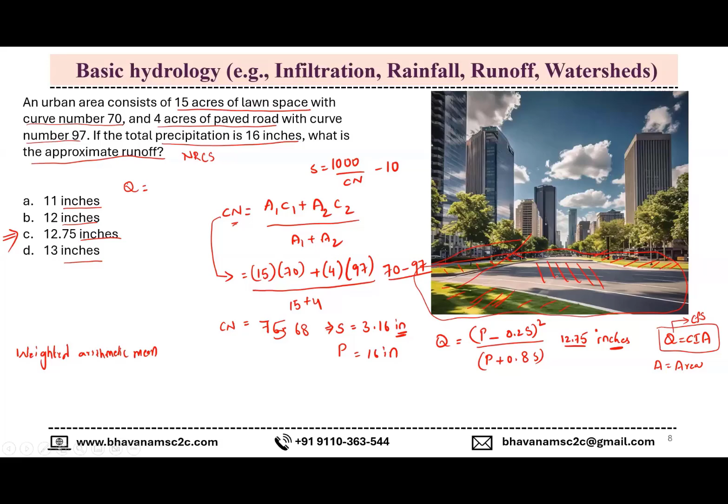But here, within this particular problem, what you are trying to identify is the curve number, which is common for the entire space. Okay, so that's the catch, where a green area got a different curve number and the paved area got a different curve number, and you're trying to get the mean curve number based upon the area of exposure. I hope the question is clearly resolved.

Yes, yes sir. Yeah, thank you.

Thank you. Got a few smart guys in the class, a good number of understanding guys, and do not get upset if you do not understand the thing in the first minute itself. Eventually you will get it. This subject is more of a visualization kind of stuff, so whatever question that you read, pay attention to it. The reason I am giving you time to understand the question is because you can visualize the question as well, so you should be able to solve this. Okay, not paying much attention to this question.